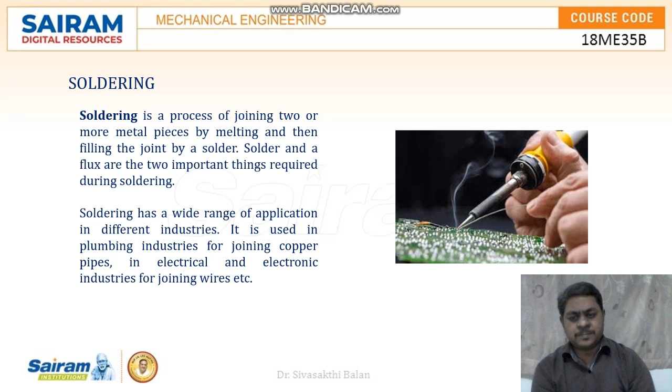Soldering is a joining process where two or more metal pieces are joined by melting and filling the joint with solder. Solder and flux are the two important things required for soldering. Soldering has wide range of applications at various industries, and it can also be used in plumbing industries as well.

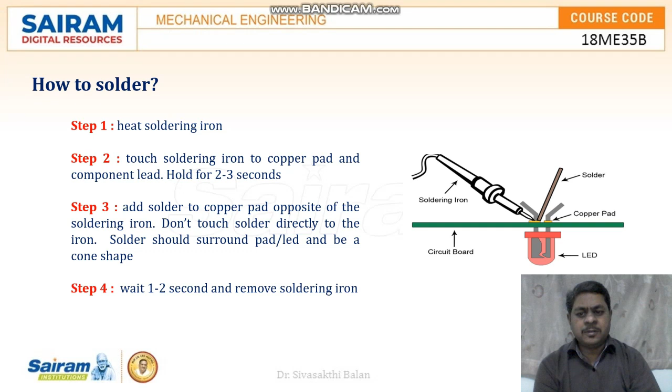How to solder? Imagine we have a plan to join the LED on the given circuit board. First, insert the LED on the circuit board, then power on the soldering iron. This causes the soldering iron to get heated up. Once it reaches a particular temperature, bring the soldering iron near the copper pad, and at the same time bring the solder near the copper pad from the opposite direction. Make sure the solder does not directly touch the soldering iron. Wait 1 or 2 seconds and then remove the soldering iron.

The key points for good soldering are: it should have a naturally glossy shine, there should be clearly visible lines over the solder, there should be a correctly shaped fillet, and the contact angle should be very small. There should not be any crack or pinholes in the soldering.

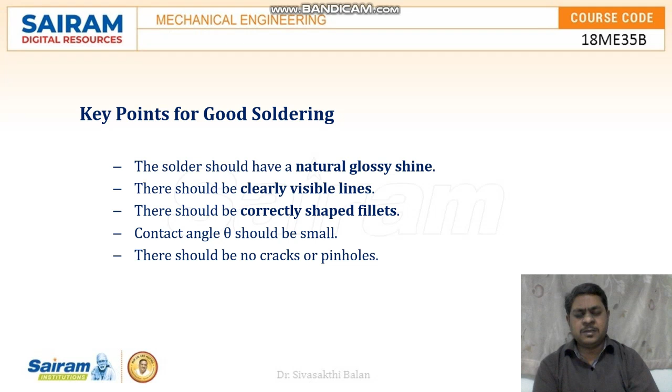Various components of the soldering process. First main component is the solder. Solder is a fusible metal alloy used to create a permanent joint between metalwork pieces. The various types of solders are lead-free solder, lead solder, hard solder, glass solder, and flux core solder.

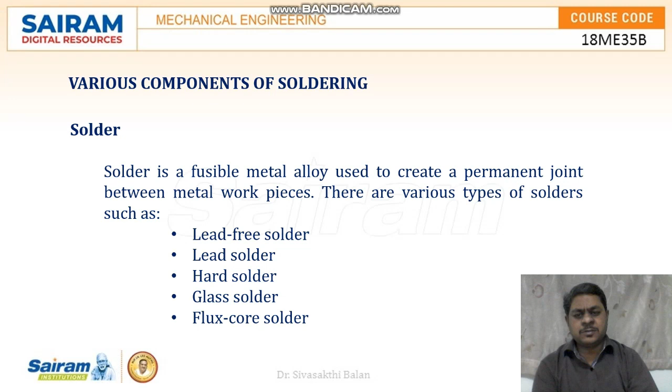Soldering iron is a heat generating source. It is capable of producing temperature up to 900 degrees Fahrenheit.

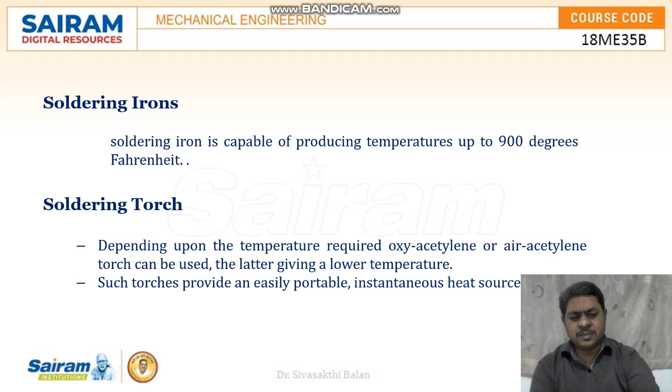Soldering torch is also a heat generating source. Depending upon the temperature requirement, there are two types of soldering torch used: one is oxyacetylene, another is air acetylene torch. The air acetylene torch gives lower temperature, and it is also easily movable and portable.

Flux. The main intention of flux is to facilitate the soldering process. The different types of flux are water soluble fluxes, no-clean fluxes, and traditional rosin fluxes.

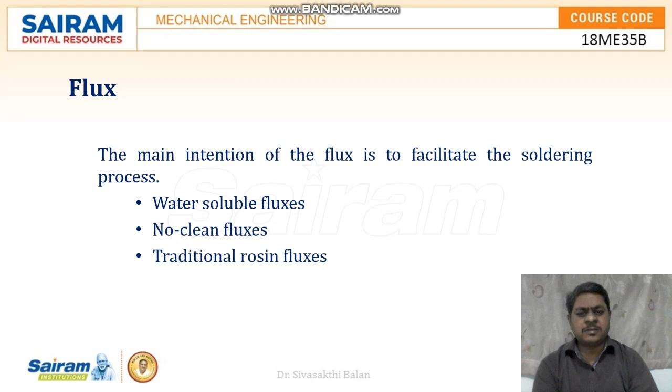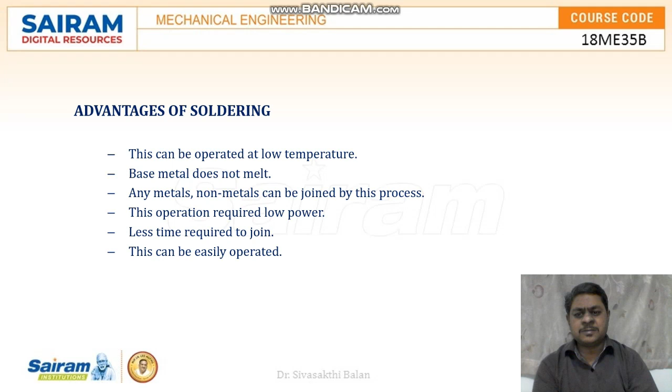Advantages of soldering: this can be operated at low temperature, base metal does not melt, both metals and non-metals can be joined by this process, it requires very low power, and the time required for joining the metal is less, and this process is easily operated.

The disadvantages: the strength of the joint is less, this is not useful when the joint works under high temperatures, for long length welding this process is not useful, heavy metals cannot be welded by these operations, and there is a chance of generating toxic components at the fluxes.

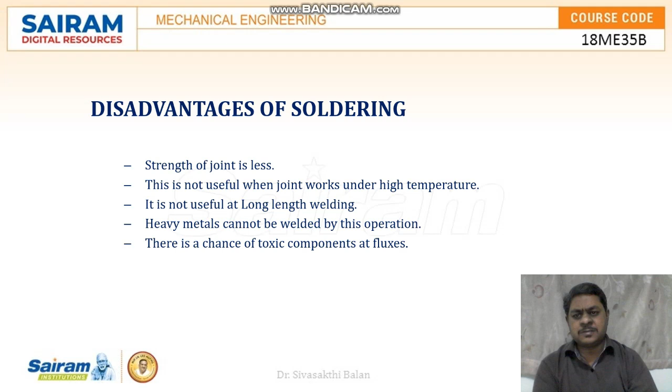Applications. Soldering is the most efficient and permanent connection between copper pipes in plumbing and joints in sheet metal. Soldering is also used in electronics and metalworks. In stained glass work, soldering is used. Electrical wiring to printed circuit boards can be done by soldering. It is widely used in electronics industries such as radio, TV, and computer industries.

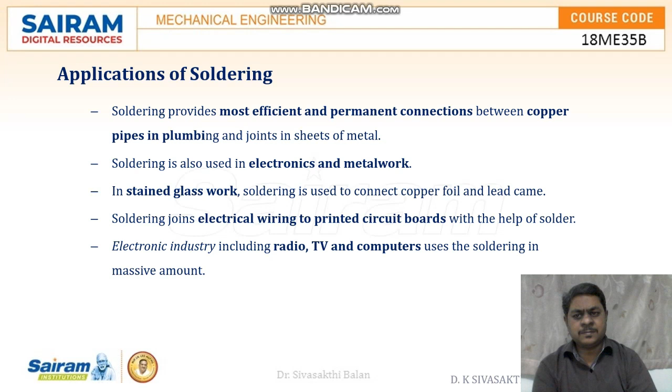Types of solder. Solder is an alloy which melts at low temperature. There are two types of solders used: hard solder and soft solder. Soft solder is made up of an alloy of tin and lead. They have low melting points between 150 degrees centigrade and 190 degrees centigrade. It is used in low loads at high temperature.

Hard solder is a silver alloyed with lead, or silver alloyed with copper and zinc are the widely used hard solders. The melting point ranges from 300 to 600 degrees depending upon the alloy composition. They are used to make strong joints that can resist high temperature.

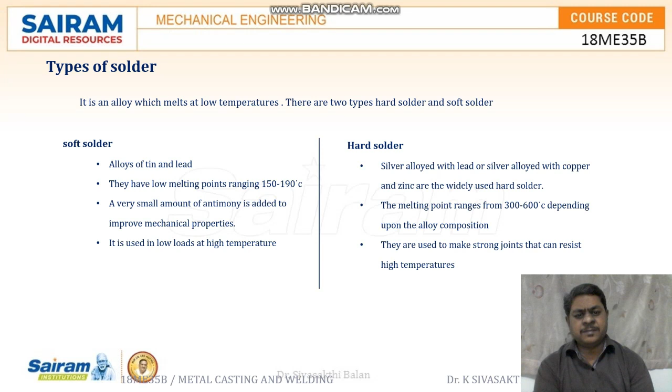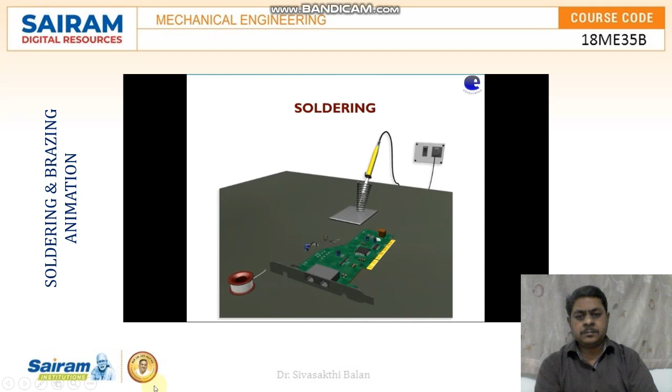The following animation shows the principle of soldering and brazing. Soldering is a method of uniting two or more pieces of metal by means of a fusible alloy or metal called solder.

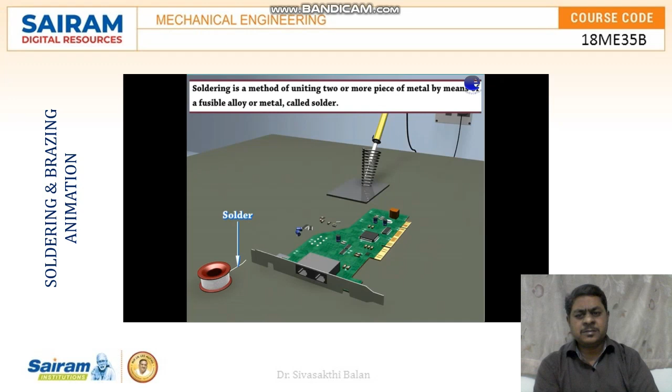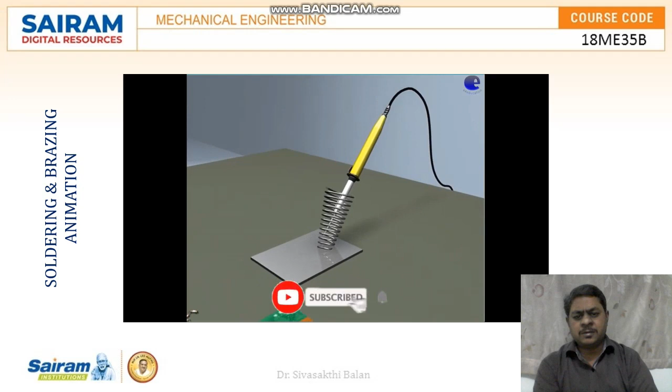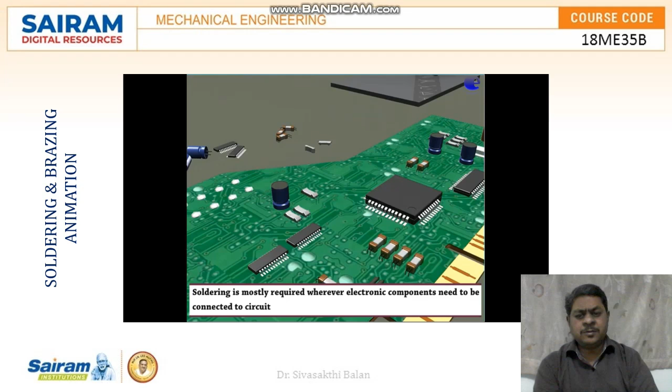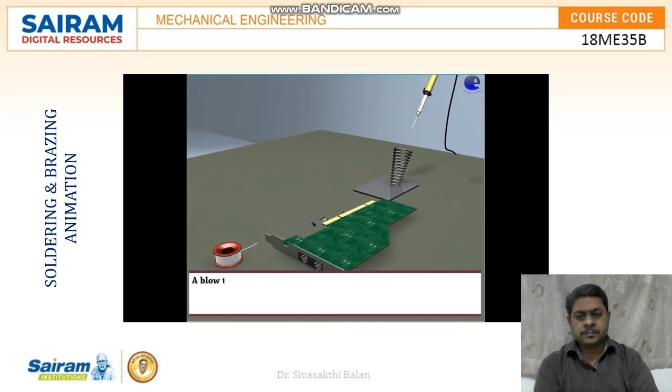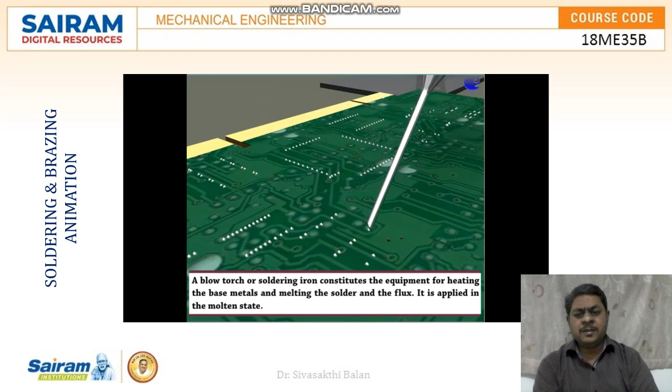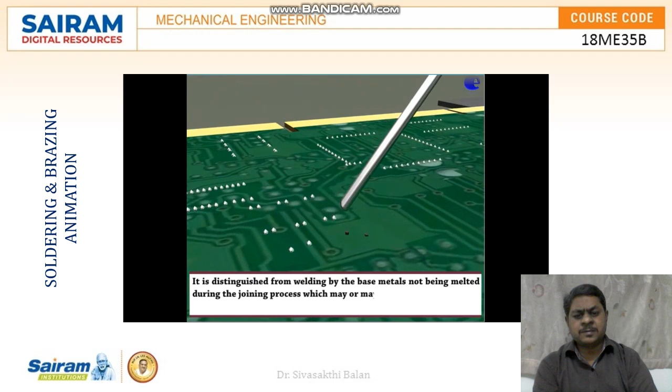A blowtorch or soldering iron constitutes the equipment for heating the base metals and melting the solder and the flux. It is applied in the molten state. It is distinguished from welding by the base metals not being melted during the joining process, which may or may not include the addition of filler metal.

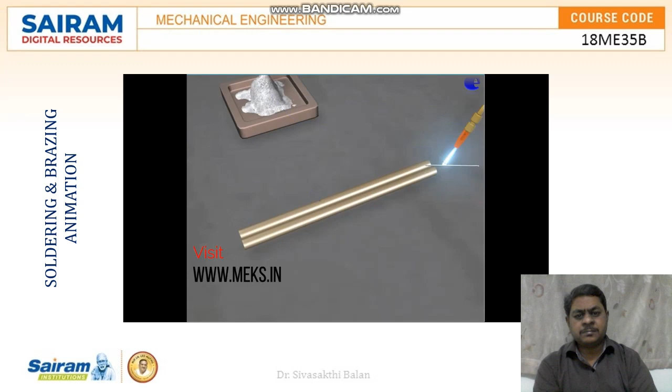Brazing. Brazing is essentially similar to soldering, but it gives a much stronger joint than soldering. The flux melter, welding torch, filler rod, and workpiece are involved. Brazing is the joining of two metal pieces by using filler metal. Mostly copper based alloys and silver based alloys are used.

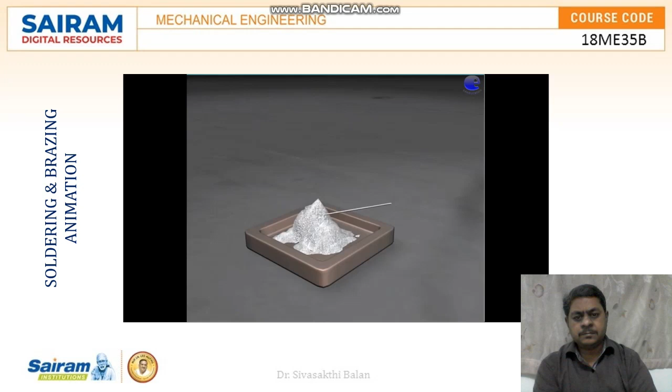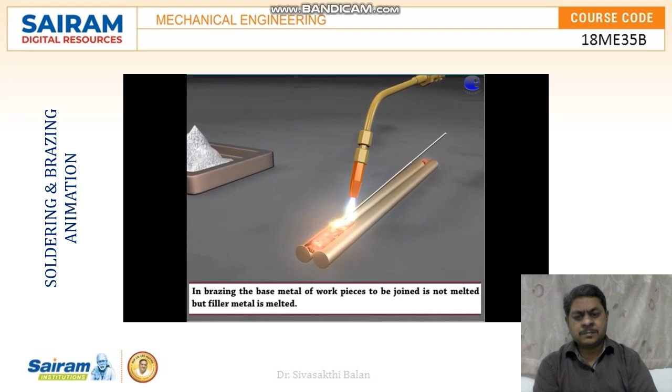In brazing, the base metal of the workpieces to be joined is not melted, but the filler metal is melted. This filler metal is in the form of liquid, adheres to the base metals, and the joint is made between the two workpieces.